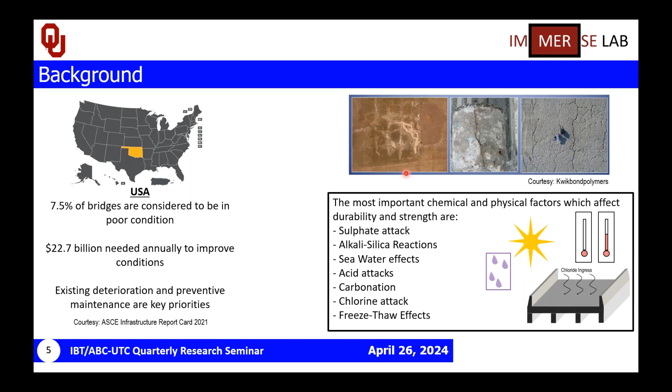What are the roles of polymer concretes in preservation treatments? If you look at bridge deck overlays, for example, when polymer concretes are used as bridge deck overlays, they minimize penetration of water, oxygen, chlorides, and de-icing salts. They act as a protective barrier on top of the concrete bridge decks, and they improve deck performance and service life of the bridges overall.

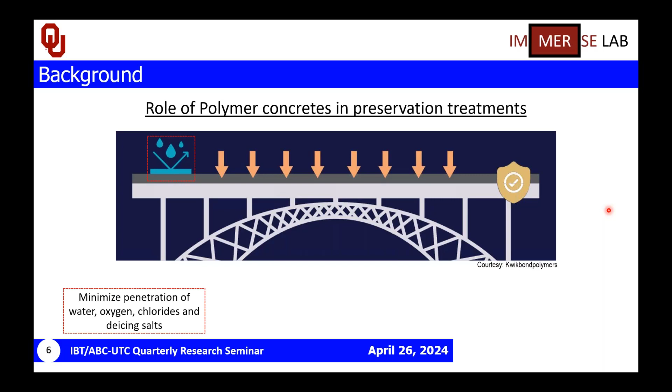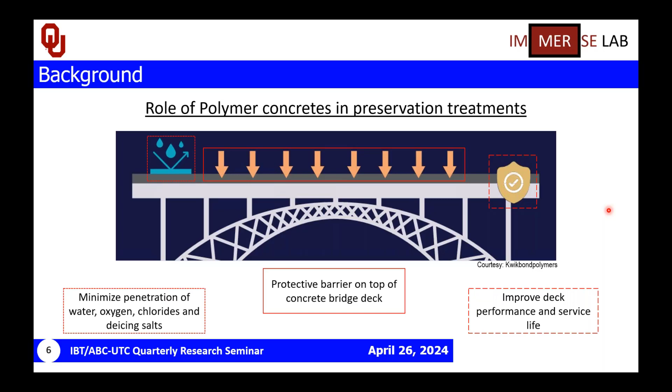In preservation treatments, the role of polymer concretes is very relevant to accelerated bridge construction, which is the scope of our work. They have rapid cure and lightweight characteristics, and they minimize traffic disruption, connected back to the rapid cure. Small thicknesses can be laid onto existing substrates, and the dead load increase is very minimal. They are also wear resistant and skid resistant, which makes them very feasible for construction applications.

We've talked about the role of polymer concretes, but I'd like to give a little background about what a polymer concrete is. Polymeric resins are combined with curing agents or initiators, and silica or basalt aggregates are used to combine with those resins. There are different kinds of polymeric resins, some terms you've already heard about. For example, epoxies and polyesters, vinyl esters are very popular polymeric resins.

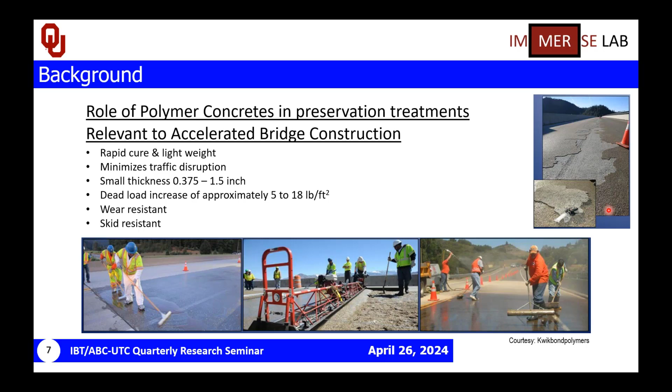If you consider methyl methacrylate, it is a methacrylic kind of polymeric resin, which is the scope of this study. The curing agent or initiator is a methyl methacrylate powder that helps initiate the polymerization process and eventual hardening of the polymeric resin. Silica or basalt aggregate is added for the strength parameter, a very fine aggregate considered here.

The scope of this study talks about nanomodification. So what is nanomodification, and in polymer concretes, how does that happen?

When nano-sized filler materials are added to polymer concrete, specifically a type of nanofiller called carbon nanotube, they've shown to improve ductility, fracture toughness, and the overall polymerization process by creating a chemical cross-linking with the polymeric chains.

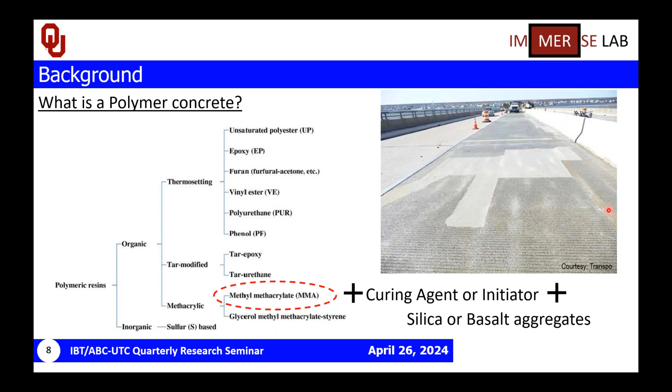If you see the image here, it's a resin chain of epoxy combined with a functional group of carboxyl group, and the CNT is shown to have a chemical attack with the resin chain itself, and that creates a chemical bonding process.

So with the improvements that carbon nanotubes have already shown through the polymer and polymer concretes, our scope currently includes carbon nanotubes for a nanomodification process.

So what is our hypothesis and what are the objectives of the study? Because of the known mechanical effects and chemical changes on polymer systems, we hypothesize that carbon nanotubes may improve bond performance of polymer concrete with the underlying concrete substrate.

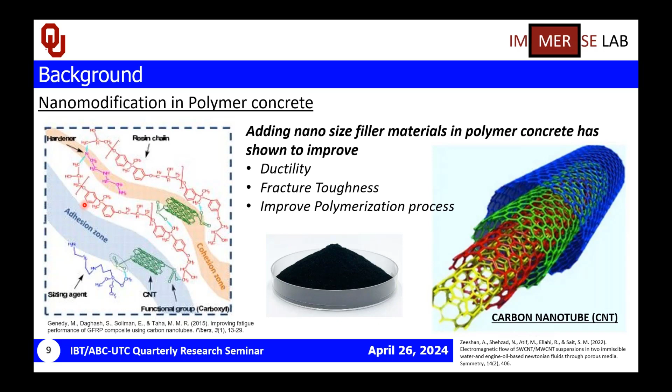The way we think that would happen, based on past studies, is because of chemical compounds and cross-linking agents that are suitable for adhesion and durability of polymer concrete overlay systems.

So the objective of this study is to assess this performance through one ASTM standard test, which is a very prominently used test in bridges: the ASTM 1583 pull-off strength of polymer concrete.

We do that by incorporating carbon nanotubes in the polymer concrete, and we study this pull-off strength with the concrete substrate in two different conditions.

With these two conditions and conducting the pull-off strength tests, we report on the interface characteristics using the quantitative data. So now I'd like to pass on to the student who's been working on these experiments.

So, Ali Akbarpur. Yes, thank you very much, Dr. Vanwanti. Can you hear me? Yes. Okay, hello everyone, my name is Ali Akbarpur and I will continue.

I will continue by talking about some of the materials and methods that we used in this study.

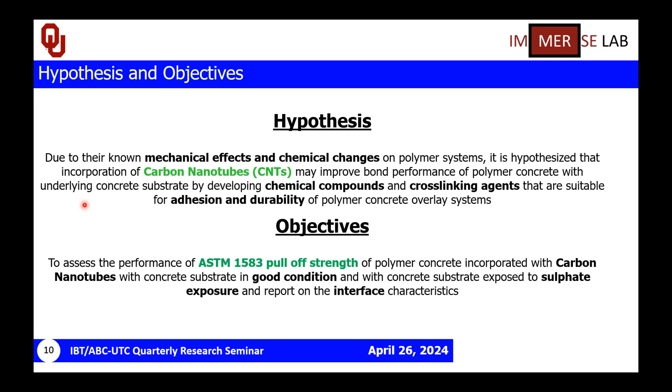We used the pull-off test based on ASTM 1583. In order to do that, we had to drill a core into the concrete substrate and the overlay material, at least 0.5 inches below the interface.

The next step was attaching the steel disc onto the overlay material using an epoxy adhesive. When the epoxy cured, we had to use the tensile loading device and a coupling device to attach it to the steel disc.

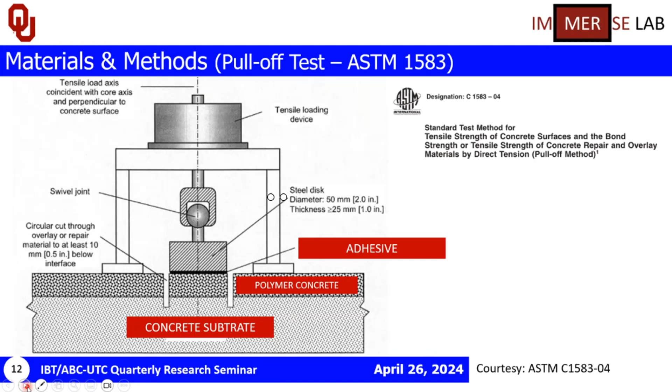Then we applied the tensile load at a constant rate, approximately 5 psi per second. By dividing the tensile load by the area of the specimen, we could obtain the bond or tensile strength of the specimen.

Based on ASTM 1583, there are 4 types of failure that can happen. If the failure happens at the concrete substrate or the overlay material, we can divide the tensile load by the area of the specimen to calculate the tensile strength of those materials.

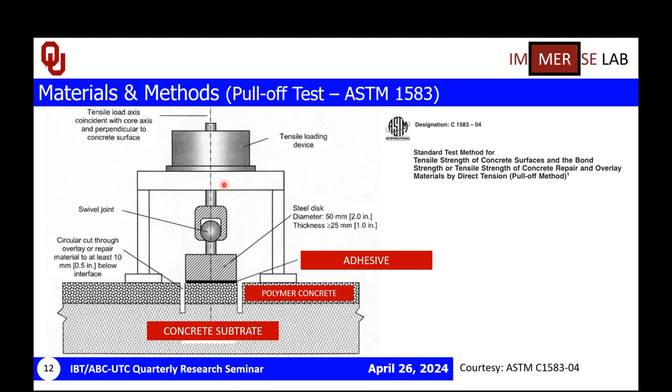But if the failure happens at the interface of the concrete substrate and the overlay material, we can calculate the bond strength of the interface, which is our desired failure mode in this study.

After doing some trial tests, we concluded that if we cast the concrete substrate for 2.5 inches and then cast polymer concrete for 1 inch on top of that, and then drill cores 2 inches into the specimen,

there is a high chance that the failure happens at the interface of the concrete substrate and the polymer concrete overlay. So in order to do that, we made wooden molds, 8 by 8 by 3.5 inches.

The next step was making the nano enhanced polymer concrete. In order to do that, the first step was to do the nanomaterial dispersion. In this study, we used 3 different types of carbon nanotube: 1 pristine type and 2 functionalized types of carbon nanotube.

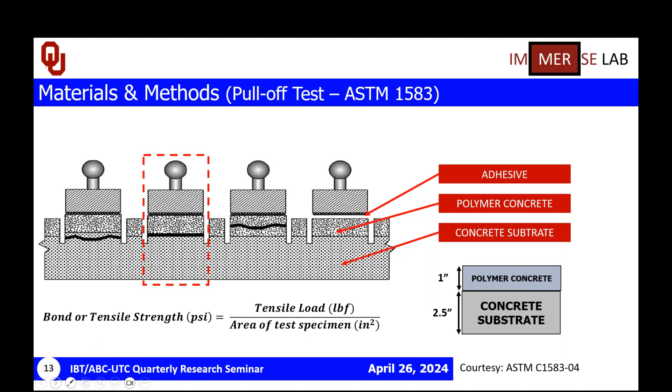COOH and amine, at 2 different amounts of 0.5% and 0.25% by weight.

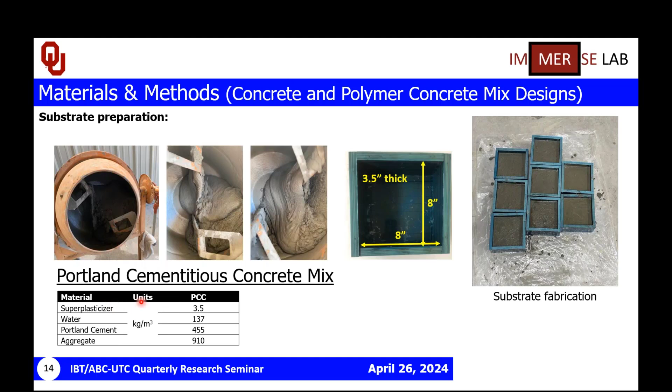There were 3 steps to do the nano dispersion. The first step was to weigh the materials, by which I mean the different types of carbon nanotube and our resin, which was the MMA.

Then we added the carbon nanotube to the MMA and put that under magnetic stirring for 2 hours at 800 RPM and 110 degrees Celsius. We used an oil bath to heat the beaker, and aluminum foil to trap the temperature inside the beaker.

After the magnetic stirring was done, we put the beaker into the ultrasonication for 2 hours at a temperature of 60 degrees. Then we brought out the specimen and let it cool to room temperature for more than 2 hours.

Before casting polymer concrete overlay onto the concrete substrate, we had to do surface preparation. We followed CSP between 5 to 9 for the polymer concrete overlays, using the ICRI recommendation, and used abrasive water jetting and abrasive grinding on the surface of the concrete substrate.

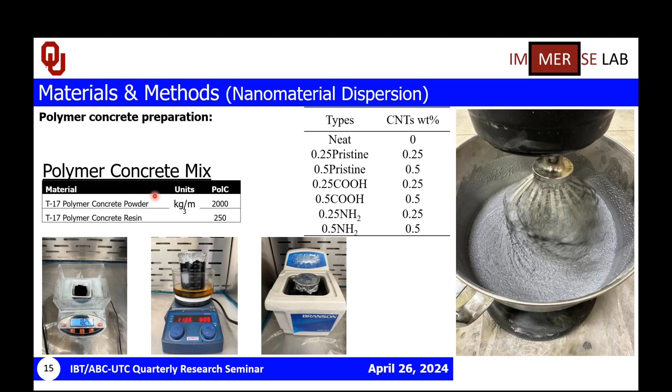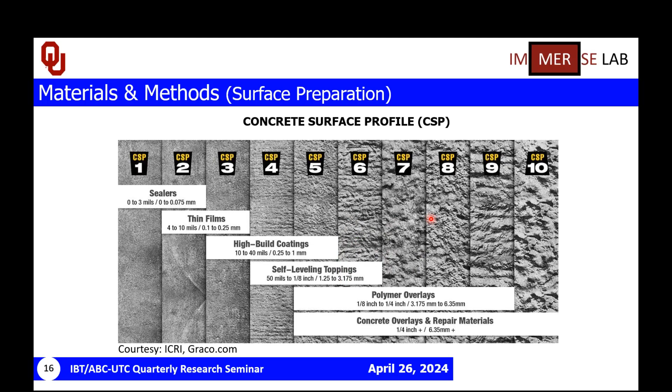After that, we had to drill cores onto our specimen. As mentioned earlier, we made 2 inch cores into our specimen using the universal drilling machine. Then we attached a steel disc on top of the specimen using epoxy. It took 3 days for the epoxy to cure, and after that the specimen was ready to perform the pull-off test based on ASTM 1583 using the Hydrajaws 2000.

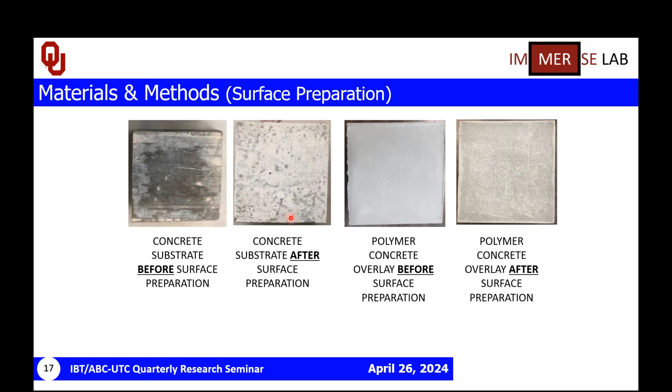Also, to understand the effects of chemical and physical factors that can affect the durability of specimens, we made a sulphate chamber to simulate sulphate attack. We used sodium sulphate to prepare the container, with a mass fraction of salt of 6%. To maintain pH equal to 3, we used sulfuric acid.

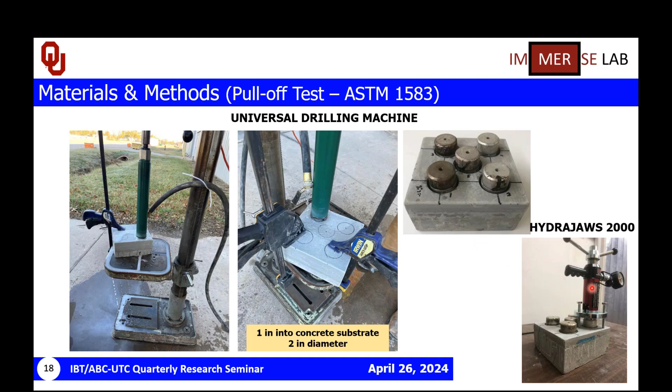After bringing out the specimen after 210 days, we did the surface preparation and cast a nano-enhanced polymer concrete on top of that. We made the cores and attached the steel discs to perform the pull-off test.

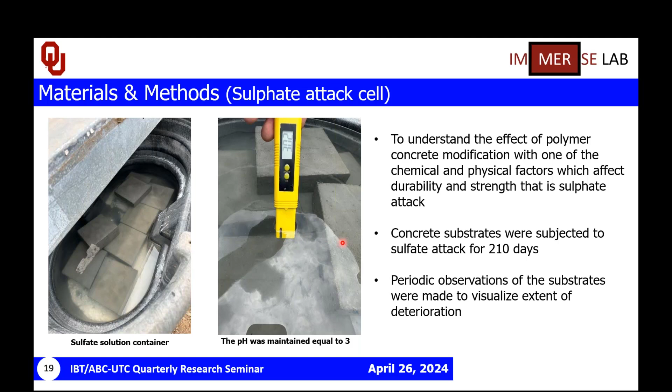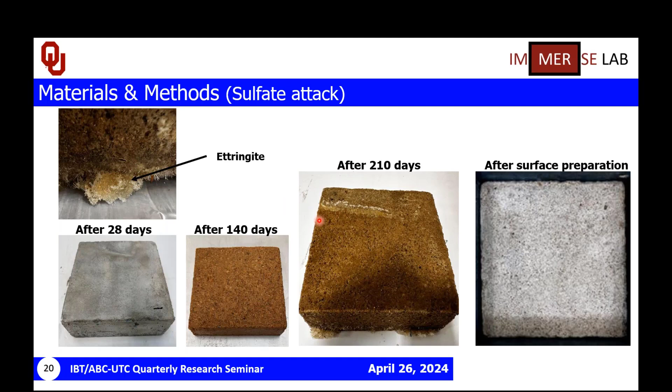Now I will continue by providing and discussing some of the obtained results. We did the unconfined compression test based on ASTM C39 and ASTM C579. The compressive strength of the concrete substrate was around 9,700, and the unconfined compression strength of the polymer concrete was 8,700.

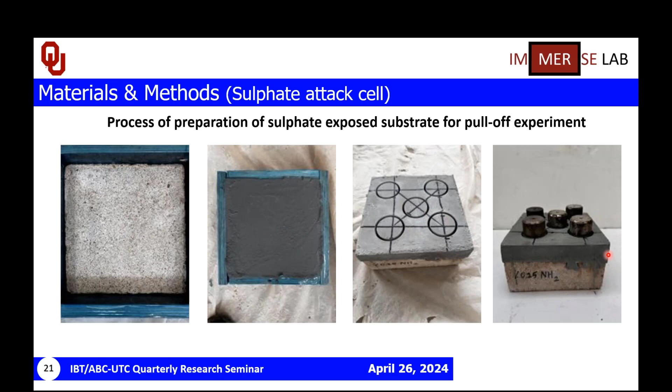We also did the MOR, the modulus of rupture test, on our specimens. The MOR of the concrete substrate was around 1,100, and the MOR of the polymer concrete was around 3,400. The MOR of polymer concrete was higher than Portland cement concrete, about 3 times the concrete substrate.

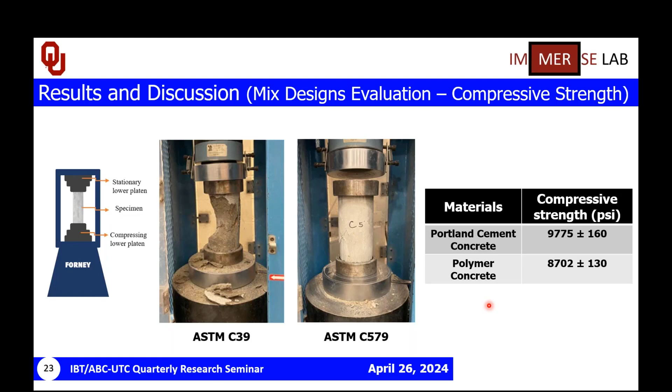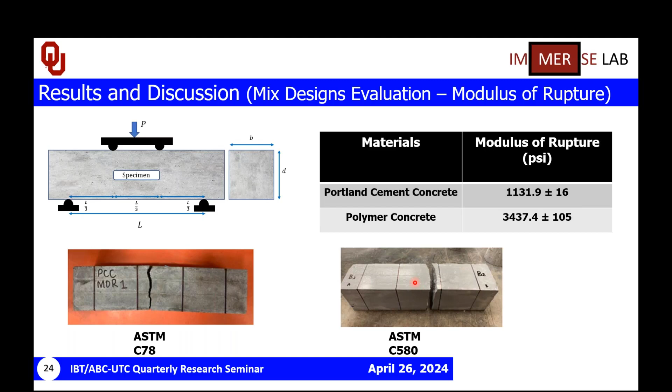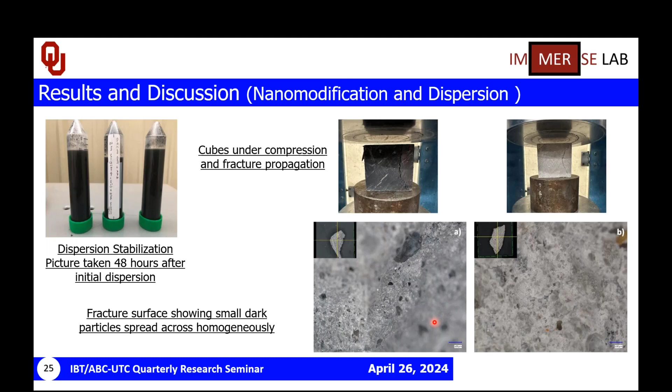Now I will continue by showing you the specimens after performing the pull-off test. As mentioned earlier, we used 3 different types of carbon nanotube at 2 different percentages by weight, and we compared them to the neat polymer concrete.

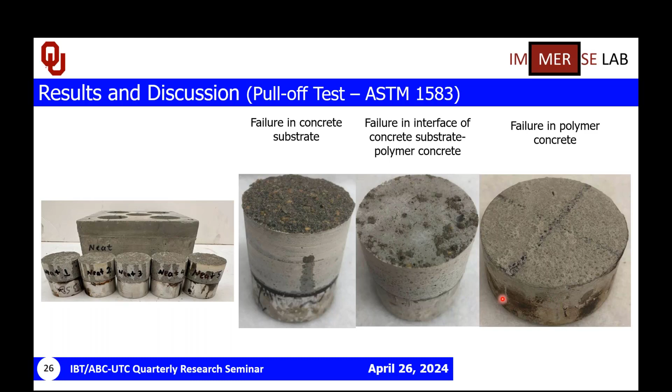As you can see, with 0.25% of carbon nanotube pristine, the failure mode happened at the interface. I should mention that we eliminated data or specimens that were detached at the steel disc, and you can see the failure modes that happen either in the concrete substrate or in the interface or the polymer concrete overlay.

You can see the pristine 0.5%, where 2 of the specimens fail at the interface. You can see the 0.25% COOH and 0.5% COOH in this figure, and in the figures on the right, you can see the specimens, the amine specimens.

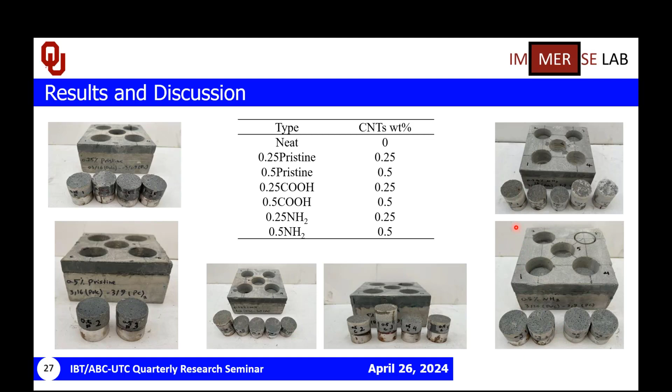Now I will continue by presenting some of the obtained data of the pull-off test on the unhealthy substrate, which was in contact with the sulphate ions.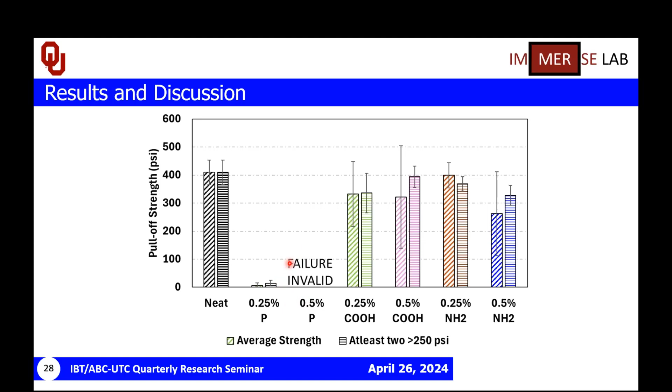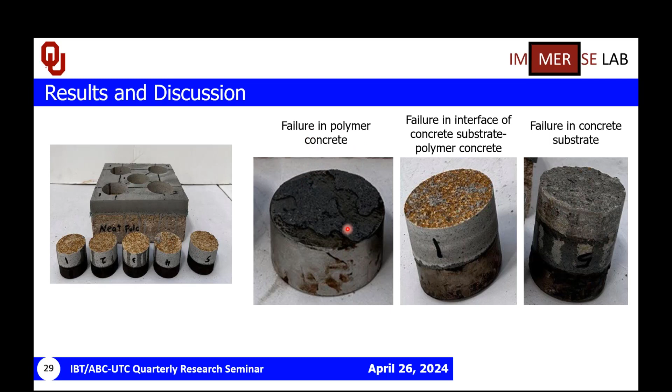Now you can see all 5 tested 0.25% COOH specimens failed at the interface. 3 of the specimens at 0.5% COOH failed at the interface, and 2 of them failed at the steel disc detachment of the steel disc specimen. And you can see the ammonia specimens on the right.

Now I will continue by discussing some of the obtained data from the pull-off strength of the specimens having unhealthy substrate.

0.25% pristine and 0.5% pristine weren't tested. The 0.25% COOH didn't show any pull-off strength, that was negligible.

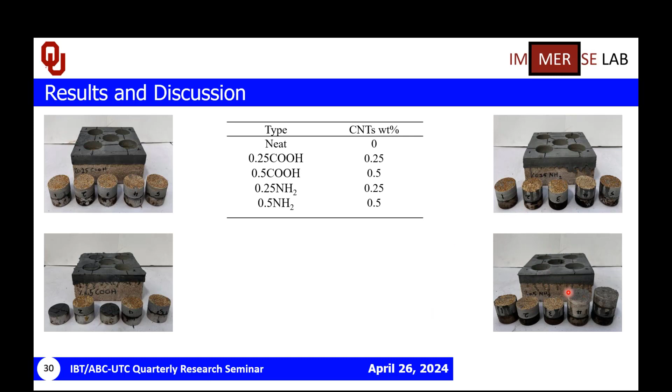As you can see, again, for bars that have inclined lines, they represent all the specimens, and for the bars that have straight lines, they represent the specimens that failed at the interface and also have a pull-off strength of more than 250 psi.

As you can see, the neat polymer concrete showed a lower pull-off strength. 0.5% COOH showed higher pull-off strength in comparison to the neat polymer concrete and all of the others. Also for 0.25% and 0.5% NH2, we didn't have results where at least 2 of the specimens had pull-off strength more than 250 psi.

In this figure, you can see the comparison of the pull-off strength of the neat polymer concrete, which had the healthy substrate and unhealthy substrate. As you can see, when we had the unhealthy substrate, the pull-off strength decreased.

Also, you can see in these 2 bars the comparison between the healthy and unhealthy substrate, while having the 0.5% COOH polymer concrete on top of that. As you can see, the unhealthy substrate showed lower pull-off strength.

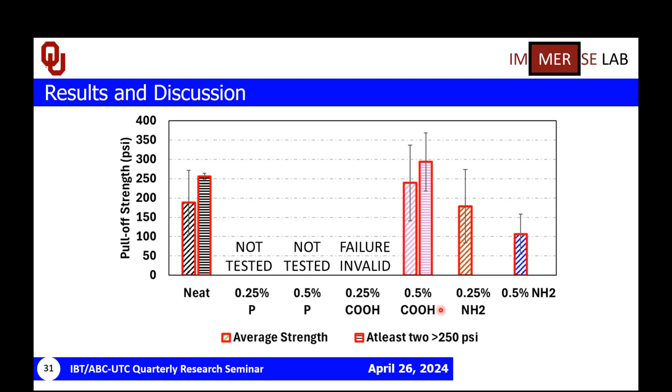In comparison, when we are having the deteriorated or unhealthy substrate, using the 0.5% COOH carbon nanotube increased the pull-off strength by 15%. This shows that if we use this type of functionalized carbon nanotube, we can have a higher pull-off strength in an unhealthy situation.

Also, you can see the interface of pull-off using the Keyence we use. You can see the microscopic images that we took from the interface of our neat and 0.5% COOH specimens in the unhealthy and healthy situation. You can also see the concrete substrate which has been attached to the polymer concrete overlay in these figures.

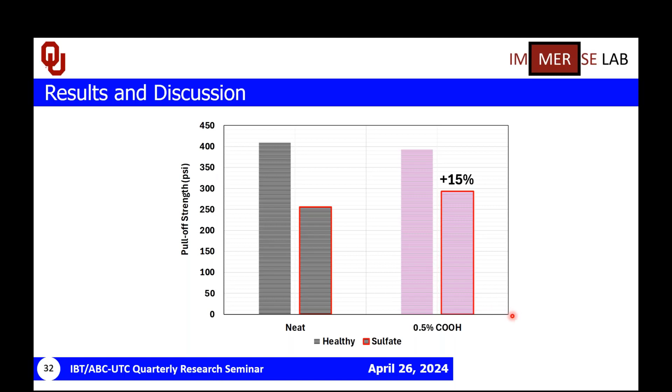Now I will conclude our presentation by providing some conclusions. This work investigates for the first time the pull-off strength of nano-modified polymer concrete. As you can see by the obtained result, the polymer concrete has a tensile strength at least three times that of concrete.

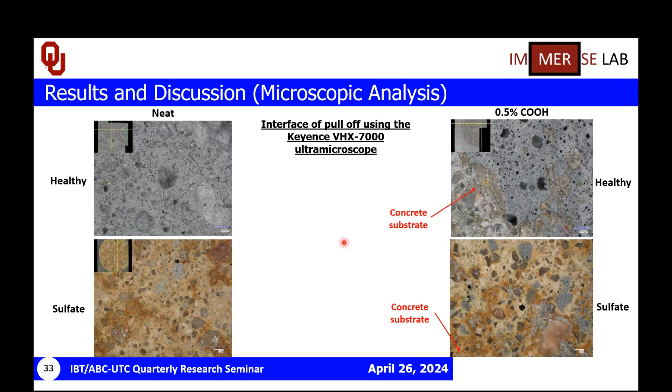0.5% COOH functionalized type of carbon nanotube showed similar pull-off strengths as neat polymer concrete in the healthy situation, while proposing other benefits such as ductility, improved fracture toughness, and chemical effects.

Also, a polymer concrete containing 0.5% COOH demonstrated a 15% increase in pull-off strength when having the unhealthy substrate, or the substrate which was exposed to the sulphate environment. As I mentioned earlier, in the microscopic images, you can see the surface damage of the concrete due to the sulphate exposure.

For future work, one can investigate the cost analysis and the effects of other chemical and physical factors on the pull-off strengths of these materials.